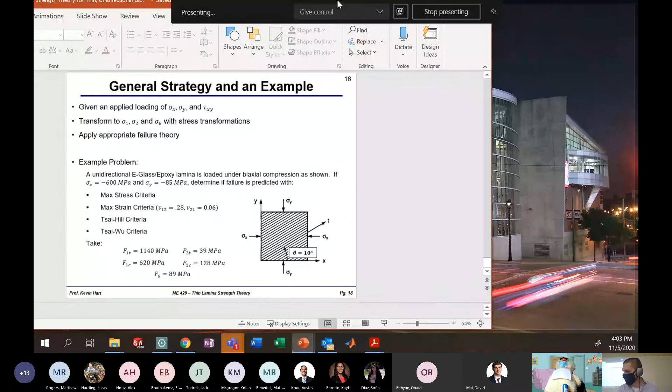This is the very last slide on unidirectional lamina failure theories. Here's a general strategy for attacking the failure theories, and there's an example problem here. I'm going to do this example problem on YouTube, make a 10-minute video to go over it, and release that to you guys, probably tomorrow. You can take a look at that.

I want to get on to laminate theory because we need a solid week to do it. So let's get on with laminate theory, which is the next set of notes, which I did post on Blackboard. That's what we're going to start on today.

All right, so away we go, new set of notes, laminate theory. Why is my pen not working? What is happening, my pen is out of ink. The old turn it off, turn it back on trick, I bet that's going to work. Yep, that worked, always works. Turn it off, turn it back on. Okay, so away we go, new notes, this is laminate theory.

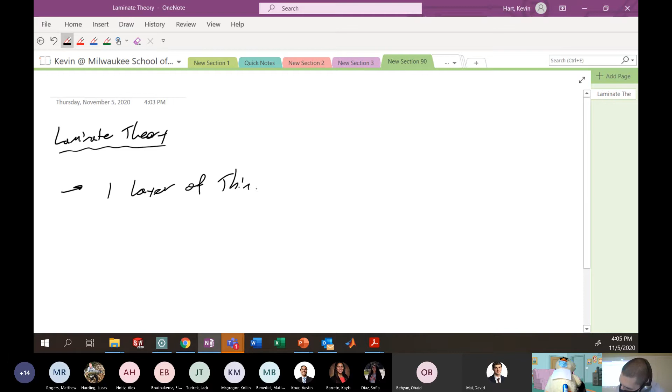The first thing we should do is define a laminate, what it is, and some of the basic theory behind it. Up to now, we've talked about thin unidirectional composites. When we talk about a single thin unidirectional layer, that is one layer inside of what could be a multi-layer laminate. Typically, one layer of thin unidirectional material we call a lamina. I've thrown that word around a bit without fully defining it, but now it's on the books.

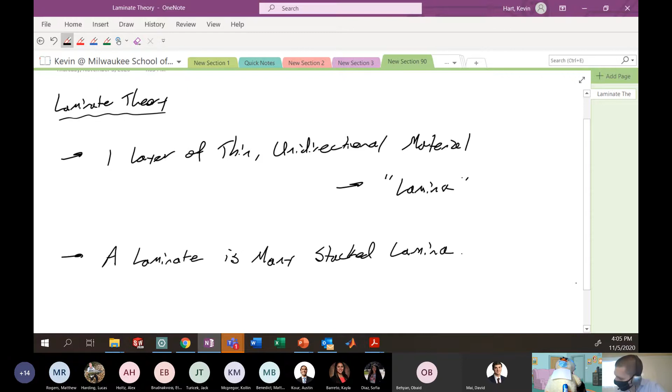Many lamina stacked on top of each other consist of a laminate. So a laminate is many stacked lamina. I'm trying to show this with a picture in the notes, this is introduction slide number 2 in the notes.

Is this idea here, and so sort of a picture of this. I bring in the picture from the notes because, again, my artistic skill is very suspicious. But here is something like this.

So basically everything we've done to this point is on this sort of lamina structure. We talked about how to get properties of that lamina, like in the direction of the fibers, across the fibers, and in some general arbitrary direction. We talked about what the failure strength of this lamina is, in the direction of the fibers, across the fibers, in some arbitrary direction.

The next step in our analysis of composites is what happens when we stack many of these lamina on top of each other to create a laminate.

Your laminate can consist of many layers that are not necessarily all with the fibers in the same direction. You could have fibers that run in multiple directions, and that's what we're trying to show with this picture. In this picture, this bottom layer, the fibers are running in this direction. The next layer above, the fibers are running in this direction. The layer above that, the fibers are running in this direction. And this layer here, the fibers are running in this direction.

So what we need to do is come up with a method for describing what is the stiffness in some arbitrary direction of that laminate. What is the strength in some arbitrary direction of that laminate. Strength theory is a little complicated, but what we want to do is describe the mechanical engineering properties. So we want some sort of engineering properties of this laminate.

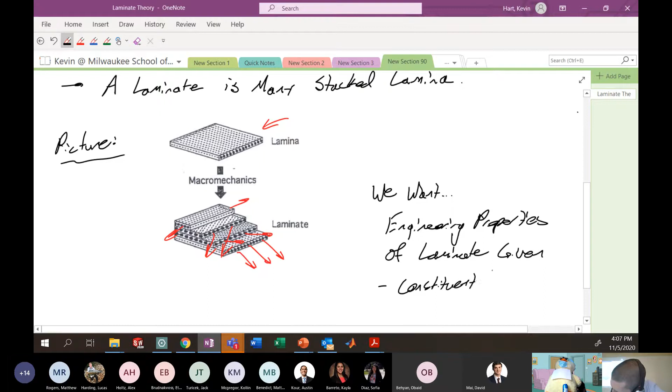Given the constituents inside of the matrix. So that's like, what's the strength of the fiber? What's the strength of the matrix? We're going to want this based on volume fraction, obviously.

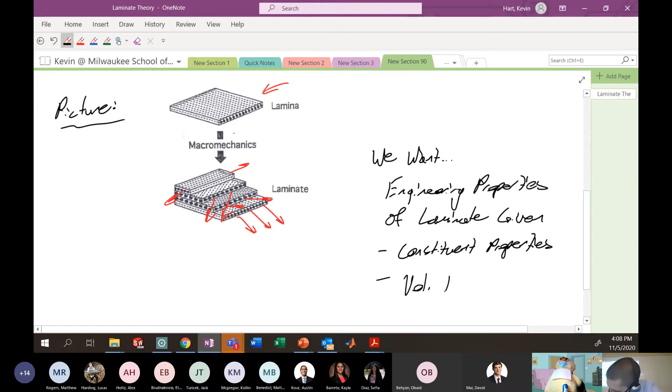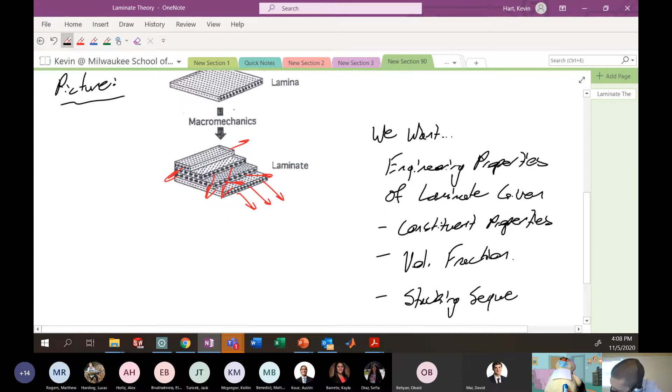The lamina orientation, or what we call the stacking sequence, will become important. And finally, the overall thickness is going to be important.

So that's what we're going to be doing over the next basically 4 lectures, is really trying to derive what is the stiffness of this material. If we apply some force, if we apply some moment, how's it going to bend? How's it going to elongate, deform, etc.? Can we get some stiffness parameters or understand what the stresses are in each one of these layers as we go through?

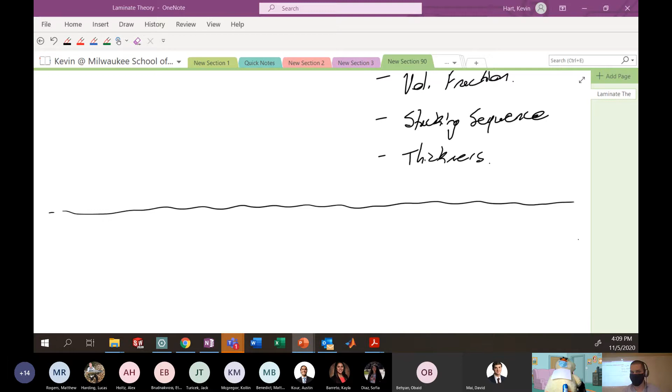So let's get into some basics about laminates, because we need to lay down some very basic ideas of what's happening in the laminate so that we can have some discussion. A laminate is created by stacking multiple lamina.

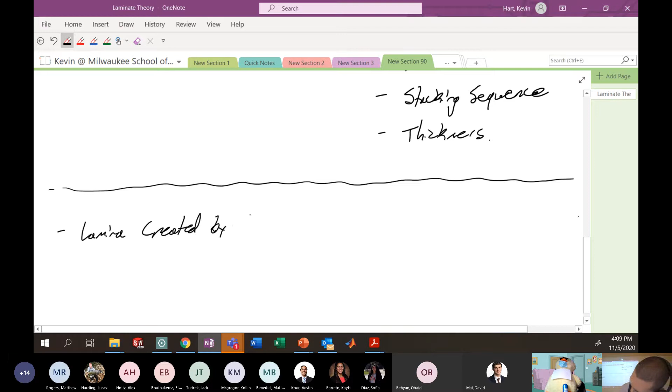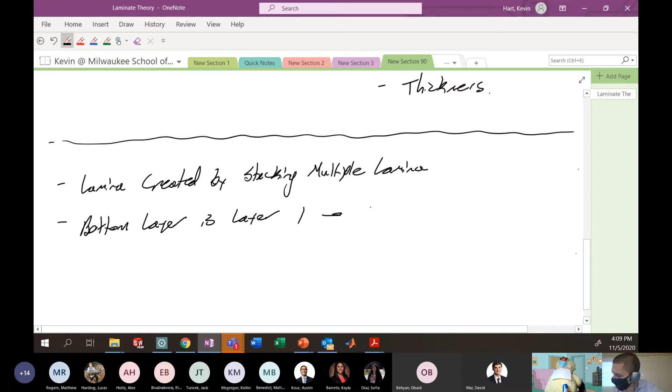By convention, we assign the very bottom layer as layer number 1, and we're going up to layer N. So N is just a number, where N is the number of lamina in your laminate.

When we're talking about a single lamina inside of our laminate, we'll generally use the convention that we're talking about the Kth lamina. So layer of interest is the Kth lamina or layer. So I might say things like, what is the stress in layer K? What is the strain in layer K?

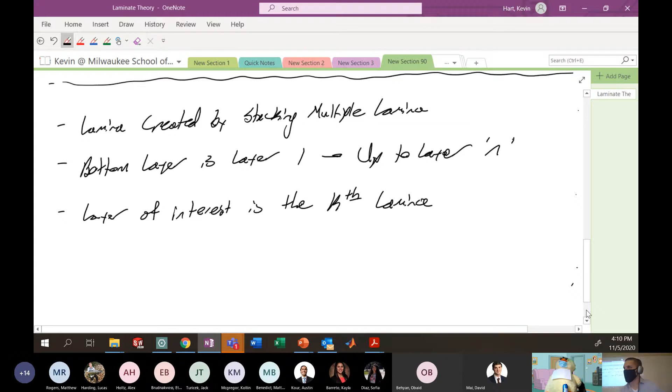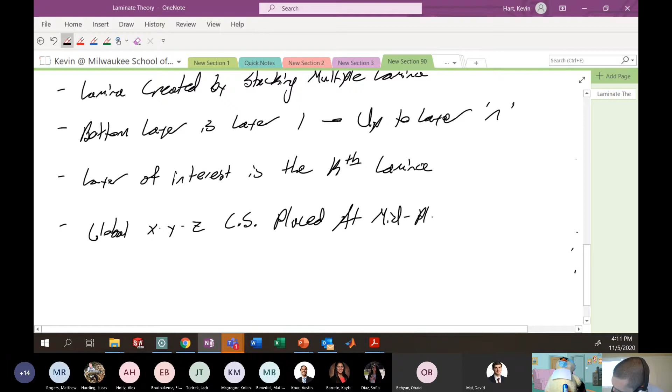When we have a laminate, we place a global XYZ coordinate system at the midplane of the laminate thickness. So the global XYZ coordinate system is placed at the midplane of the laminate stack. And we always say that the Z direction is the out of plane direction.

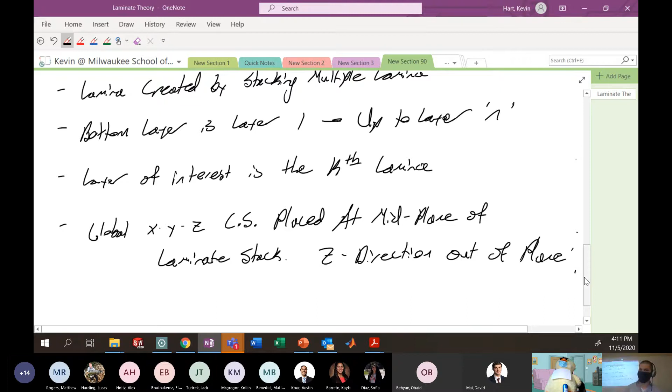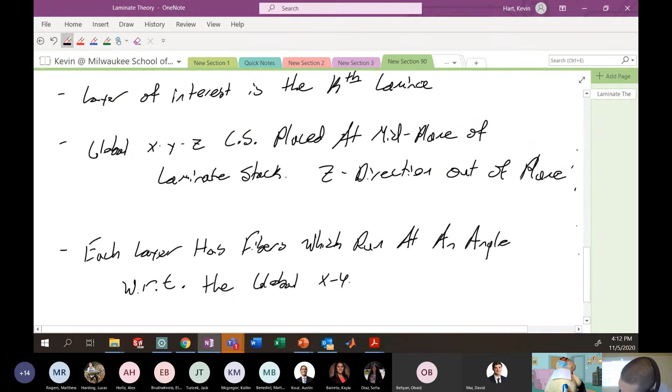Then each layer that exists inside of that laminate has its fibers running in a direction that is oriented in some way with the XYZ coordinate system. So the XYZ coordinate system is global for the laminate, and you define it. Then each individual layer inside of that laminate has an orientation with respect to the global coordinate system. So each layer has fibers which run at an angle with respect to the global X, Y, Z coordinate system given by theta K. It's the angle that your fibers make with the global XYZ coordinate system.

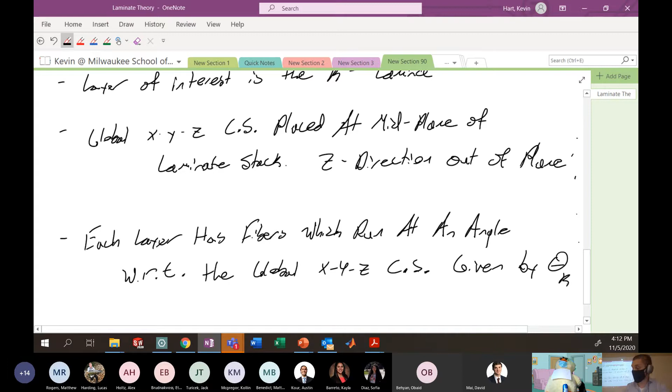Okay, so let's sort of draw a side view of what a laminate might actually look like.

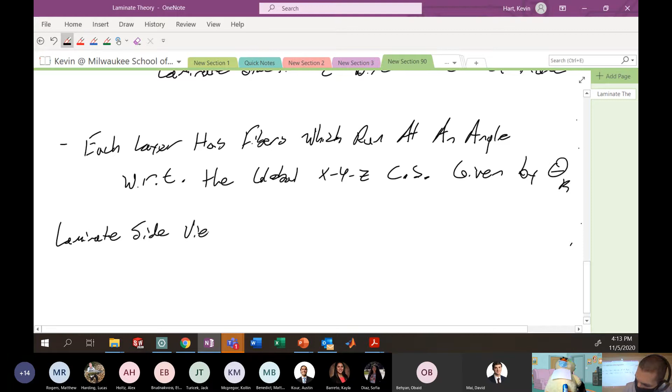Okay, so I'm stacking multiple layers on top of each other. Let's say I'm making an 8-layer laminate. So we segregate this in half, segregate this in half, segregate this in half, and each one of those goes in half. Okay, so this gives me an 8-layer laminate. So here, n equals 8, okay, 8 layers.

I'm going to put my global XYZ coordinate system emanating at the midplane. So my XYZ coordinate system, I'm going to be looking at just one side of this laminate. So here, this is like X, Y would be into the page, and Z is your through-thickness direction. So that's where my XYZ coordinate system sort of emanates.

Each one of these layers has a number. This is layer number 1, it's on the bottom, so here this is layer 1. And we'll say that for this particular layer, K is equal to 1. The kth layer, K is equal to 1, this is the first layer. And obviously this very top layer, K is equal to N, which here is equal to 8.

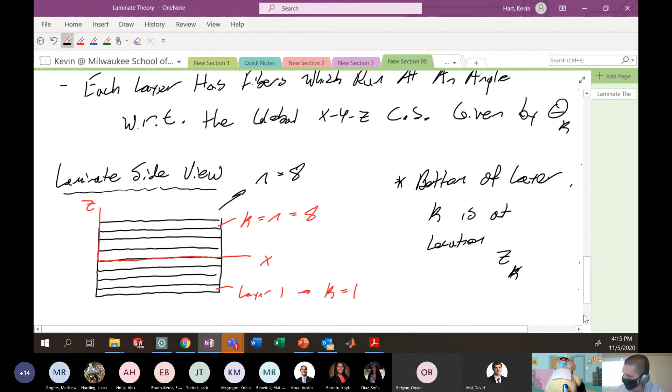So this distance here would be Z sub 3, okay, it's the bottom of the third layer. That location is Z sub 3. This location here would be Z sub 7, just as an example, the bottom of the 7th layer.

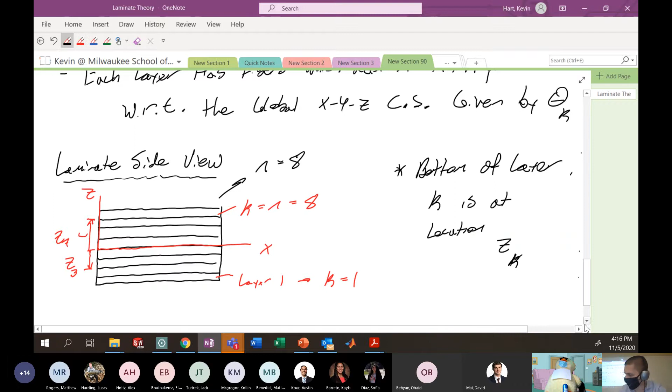That's because we don't want any zero index, right? Z1 is the bottom of layer 1, Z2 is the bottom of layer 2, so on and so forth, all the way up to Z8 up to Z9 for the top of my 8th layer.

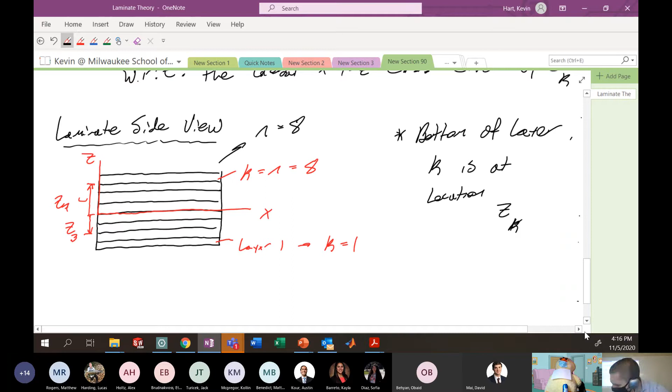Yep, that's right. All right, so there we go. We got some basic semantics down for how we're organizing the coordinate system and talking about our individual layers. Now what we want to do is talk about the laminate stacking sequence and really hammer that idea home, because that'll be important as we move forward.

Next. Laminate stacking sequence. Oh, handwriting today, just too much coffee. I was trying to stay awake grading your papers.

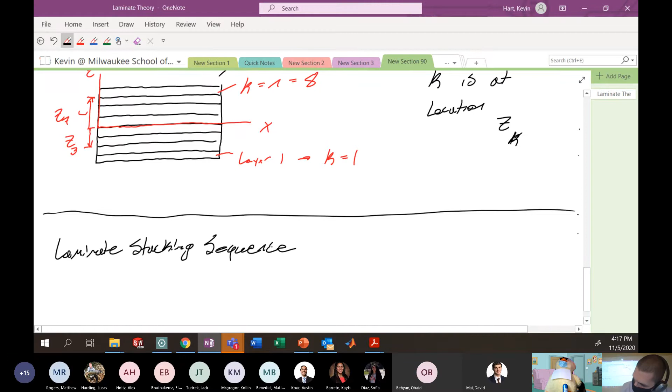All right, your laminate stacking sequence. So when you go to create a composite laminate, you want some sort of method to describe how you're doing the layup in a shorthand way. If I'm going to make a laminate and stack 16 layers on top of each other, I need some fast way to tell you, if you're going to be manufacturing it for me, how I want you to stack those layers on top of each other. So I need an easy way to describe that, and the stacking sequence is what is trying to achieve that.

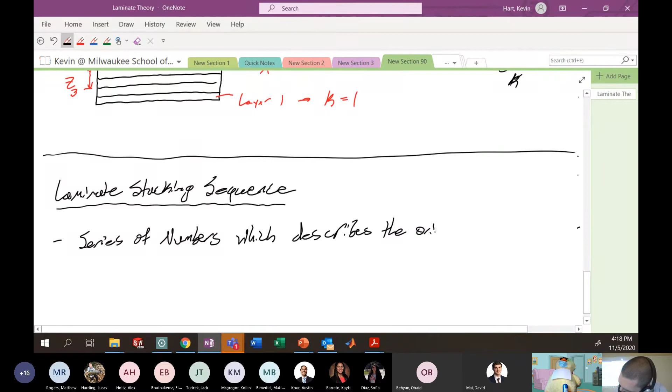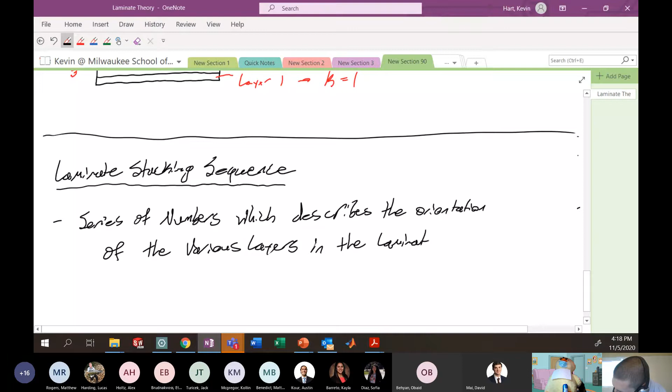The stacking sequence is like a series of numbers that describes how the various layers are stacked on top of each other to make your composite. This is a series of numbers which describes the orientation of the various layers in the laminate with respect to the global XYZ coordinate system. And when we do this, the first value in the stacking sequence is the bottom layer.

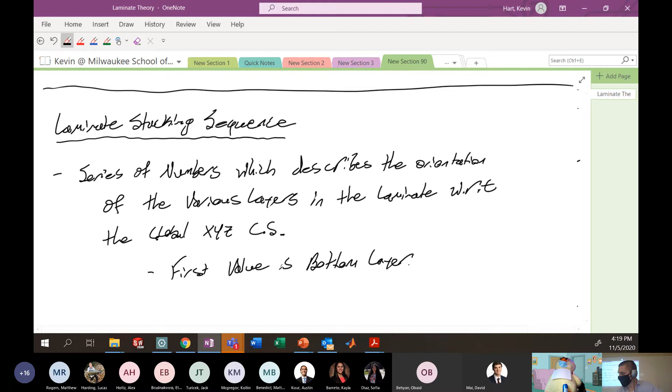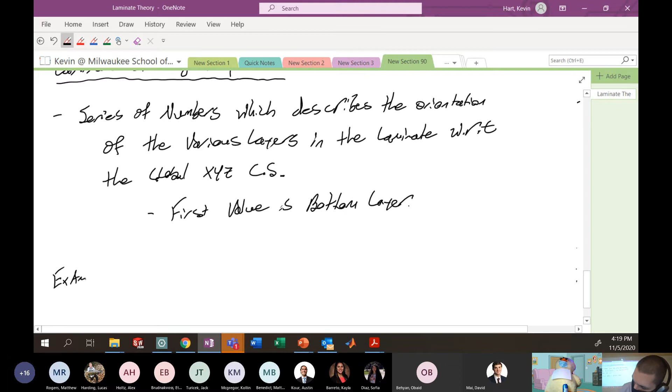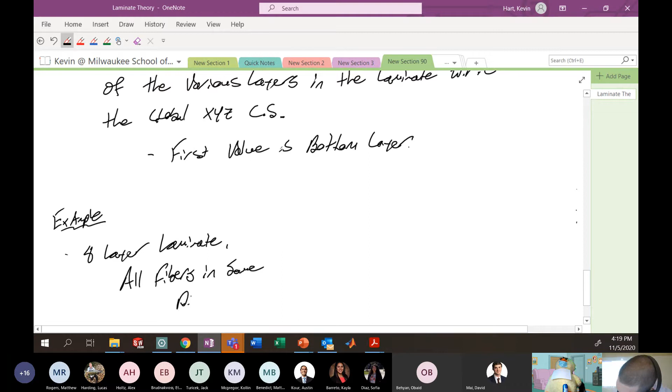Okay, so best illustrated with an example. So one example might be if I want an 8-layer laminate where every single layer has the fibers running in the same direction. What would that look like? Well, that would be like if I did this following situation.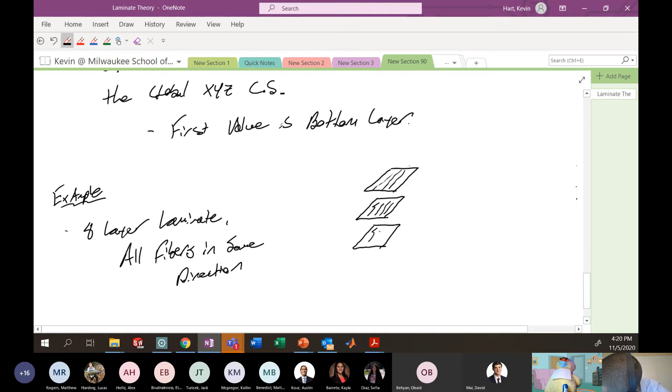So here, this is what's going to be the top layer. Then the next with the fibers running this way, then the next with the fibers running this way, 8 total. These are all going to be stacked on top of each other to make my composite.

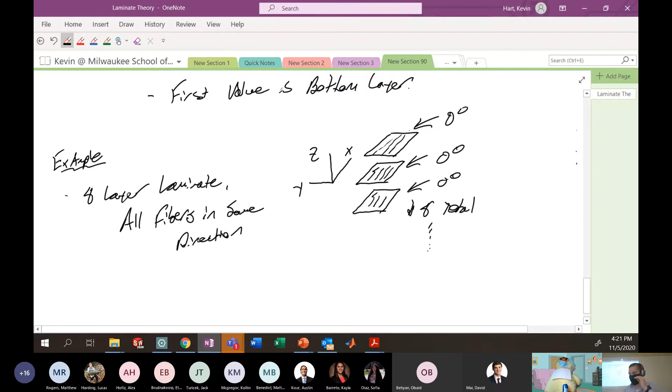So if my global XYZ coordinate system was something like what I would expect, then this particular layer has its fibers running in a 0-degree orientation. These fibers run in the same direction as this x-axis, right? Same thing with the layer below it, those fibers run in that x-axis, okay? So this would be a 0-degree layer, this would be a 0-degree layer, this would be a 0-degree layer, and all of the ones that would create for me an 8-layer composite would all have this orientation of 0 degrees.

So the stacking sequence is the following: 0, 0, 0, 0, 0, 0, 0, 0. That's your stacking sequence. Pretty straightforward, okay, a lot of zeros. You guys are used to that, right? No, just kidding, you guys do all your homeworks. Some of you, I don't know, a little suspicious. I don't want to write all those zeros.

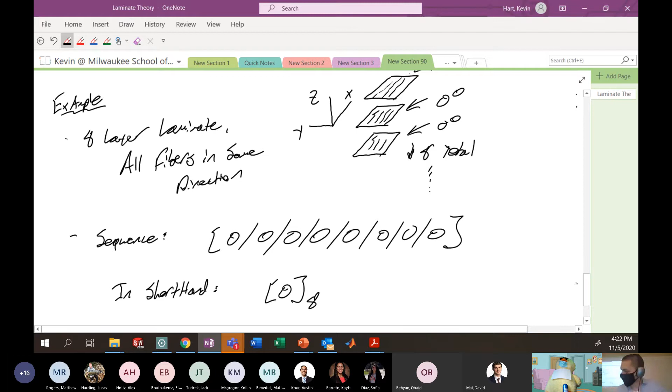That's kind of annoying, so in shorthand this is typically seen as the following: 0 subscript 8. Okay, that's 8 layers of 0-degree orientation lamina laid on top of each other. All right, let's do one more example.

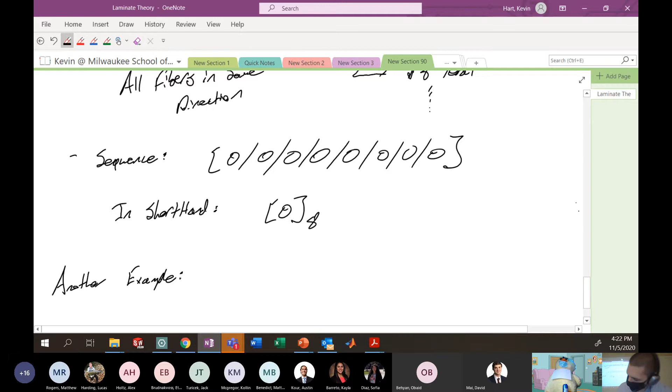We may wish to create a laminate that has an equal distribution of layers pointed in various ways. This would create for us what we call a quasi-isotropic structure.

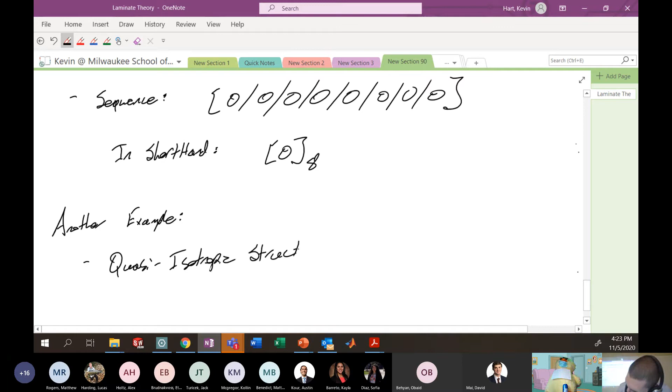Let's say that stacking sequence was 0, 90, 45, minus 45, minus 45, 45, 90, 0. The idea here is that I lay one down at 0 degrees, then another at 90 degrees to that, then another at 45 degrees, another at minus 45 degrees, minus 45, 45, 90, 0. That's the general idea. This would be another 8-layer structure, but it has a different stacking sequence, so you get 2 different kinds of ideas.

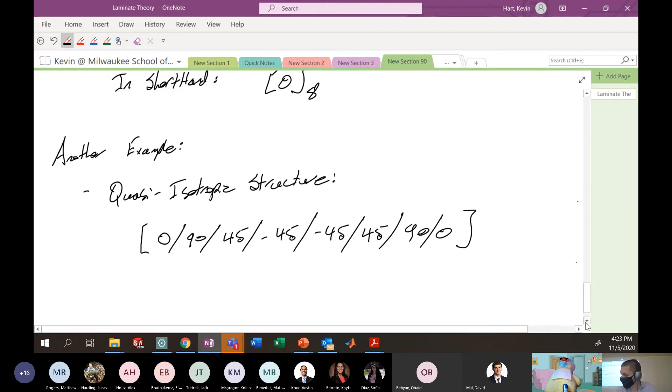I'm not going to try to draw that one. There's actually a picture of this in the notes, and I'm just going to bring in both pictures here so you can see this. It's a little bit better from the notes.

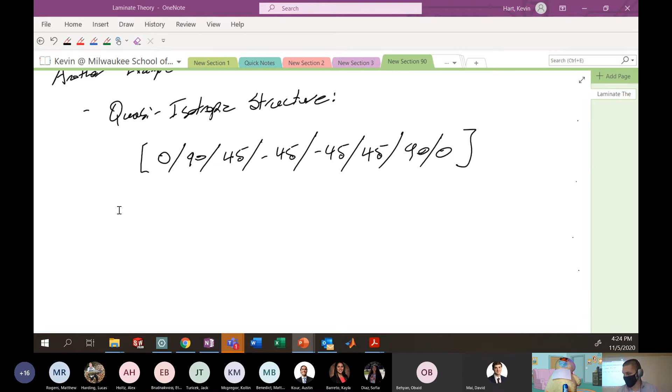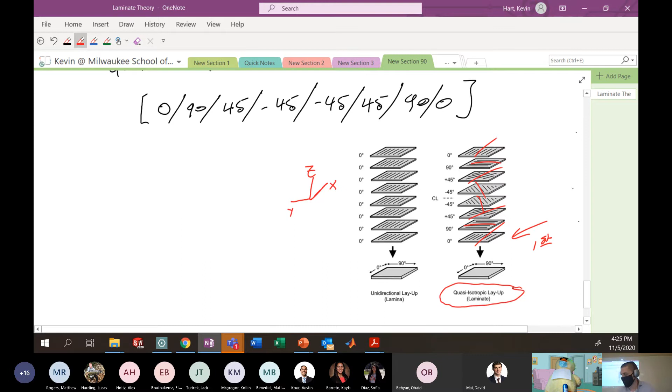Again, this is an 8-layer laminate, and I might want to write this in shorthand. We have a method for that: 0, 90, 45, minus 45, closed off with a little s on the bottom for symmetric. So basically, when you have a symmetric laminate, you do those 4 layers, and then you mirror that about the last layer.

So remember, this is like layer 1, 2, 3, 4, then 5, 6, 7, 8, if it were symmetric.

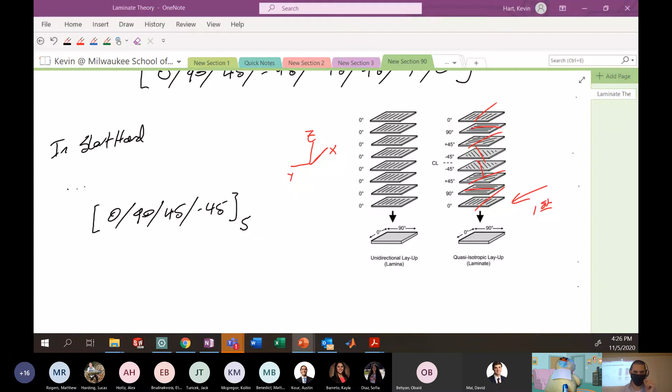Okay, now that we got some nomenclature out of the way, let's do some math. I'm going to bring in a figure here that will become the Bible of our derivation over the next probably 3 lectures. I'm going to give you some time to copy this figure because it will be somewhat important for what we're going to do. So here you go.

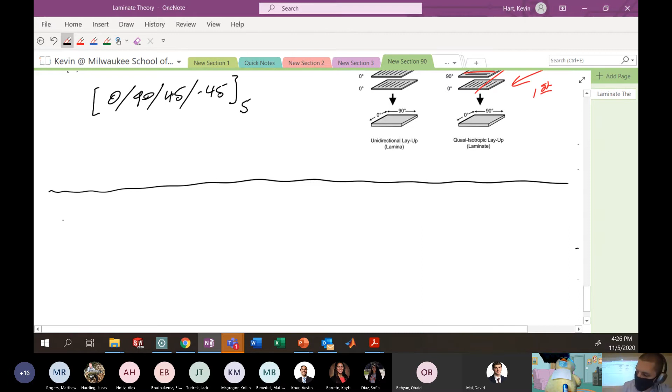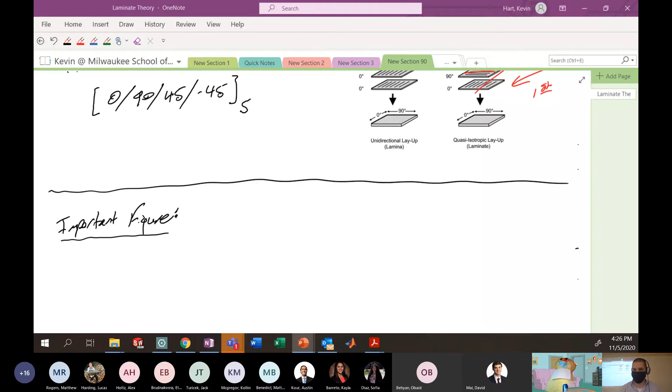Important figure. Instead of trying to draw this myself, which we all know is a bit suspicious, I'm just going to bring in the figure here and hope that you can do your best to copy this down.

I'm going to talk about this figure and how we're going to use it in our derivation. Here's this figure. I'll give you a couple minutes here, but I'll talk about this as you're copying it down. Again, we see our global coordinate system, this X, Y, Z, and we notice the XY plane is in the center of the laminate stack. The XY plane is in the middle of that stack.

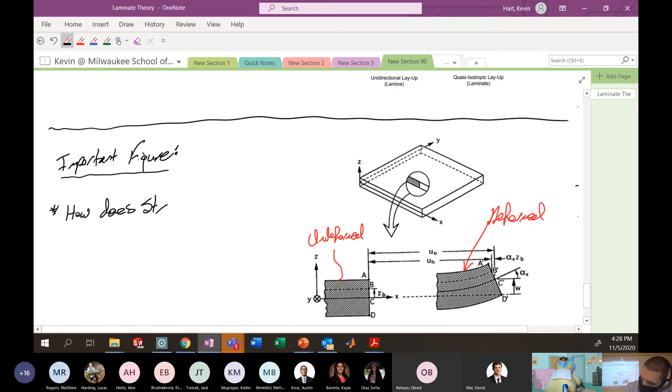What we want to do with the upcoming derivation is assume that this here is like an undeformed condition, and we're moving to a deformed condition. I want to investigate how an arbitrary point in the center of that laminate, this point B, how does the strain develop as we move from the undeformed condition, point B, to the deformed condition, B prime?

I'll give you a couple minutes to do your best with that figure. I really encourage you to copy that down right now.

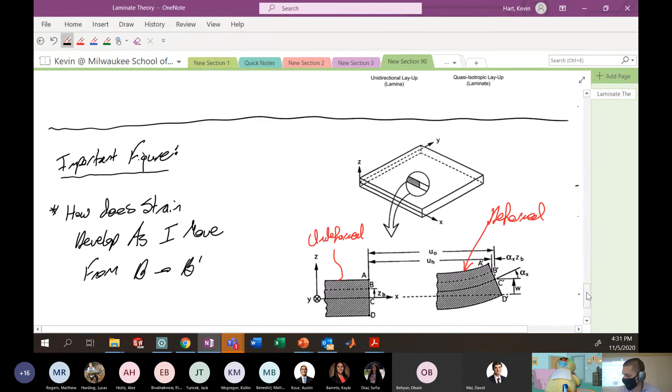Well, yeah, it evolved from bats, I guess, but crazy. Guess my dog better not cough on me. Gotta start putting a mask on Rocky.

Okay, so here's the general strategy. We're going to start with this general laminate, and notice that we haven't drawn any layers in there. We're just talking about a generic plate.

The first thing I want to do is, since I know this plate is deforming the same way regardless of how many layers I have, we're going to assume all those layers are moving and straining together. So all the layers will have the same strain. That's the strategy.

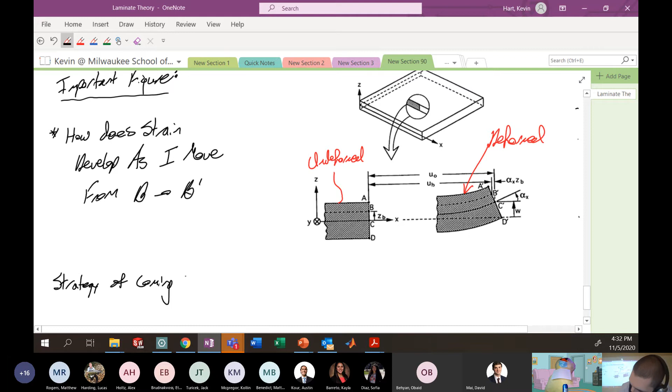Of the upcoming derivation: one, we're going to start with this general plate and define the strain at this arbitrary point, which I mentioned is point B. As we go from B to B prime, what is the strain that develops?

Remember, strain is like the deformed length divided by the original length, right? Once we have that strain, we can say that it develops in some sort of variation through the thickness of the laminate.

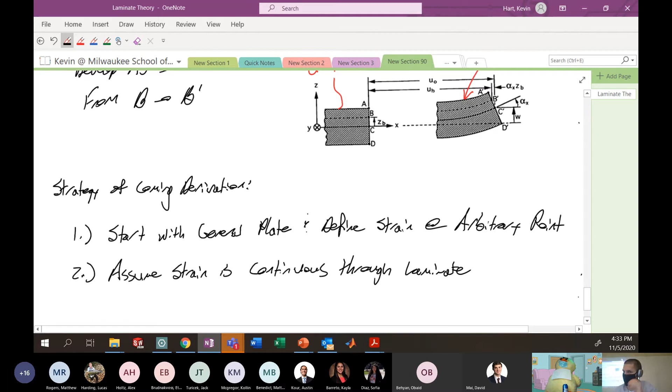So we assume the strain is continuous through the laminate. Okay, and that will allow us to determine the stress in layer K.

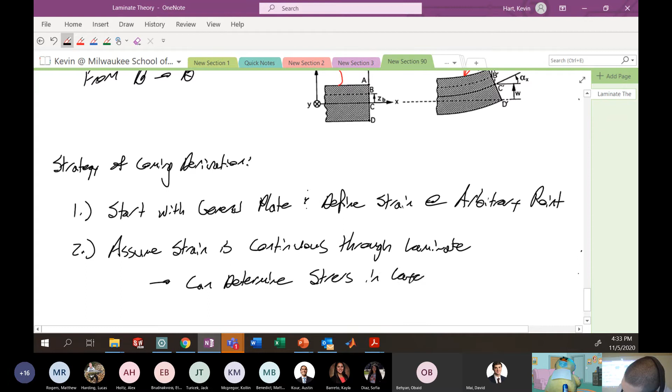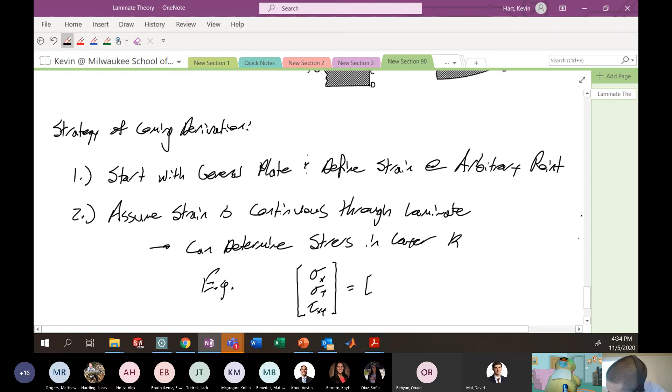For example, if we have epsilon x, epsilon y, gamma xy, which we're going to derive, giving our little plate theory - sorry, we want the stresses. So we can calculate the stresses, assuming we have some sort of stiffness Q of layer K, multiplied by the strains that we develop in layer K. That's the general concept.

So the stresses that develop in layer K is just the stiffness of layer K, which we know, multiplied by the strains that are in layer K. Okay? K.

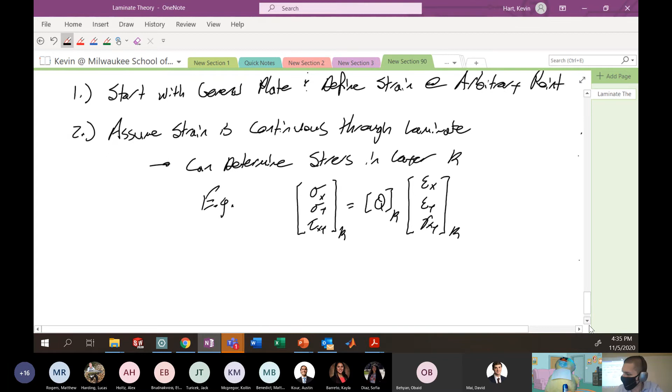Then we're going to add up all of the stresses inside all of the layers in one particular edge of the laminate and say that the total area of that edge multiplied by the stresses in each one of those layers has to equal the original force we put on the laminate in that direction. That's the general idea of the next piece.

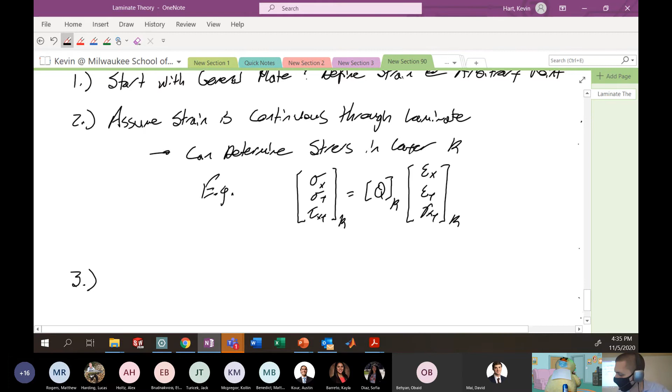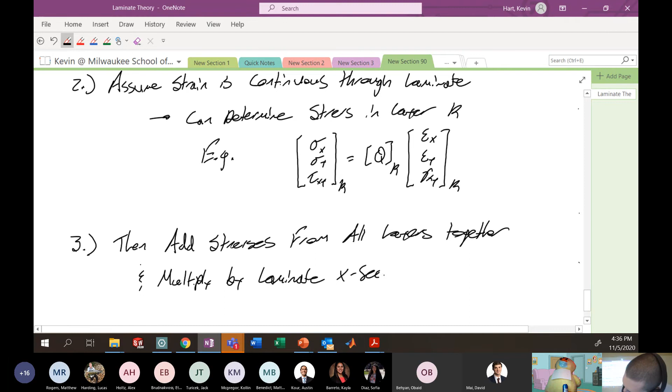Then, add stresses from all layers together, and multiply by laminate cross-sectional area, and enforce equilibrium.

Such that, in shorthand, the stresses that are developed multiplied by the area of that cross-section equals whatever force is on that particular side of the laminate. We're trying to balance the stresses inside the laminate with whatever forces we applied to the laminate. Sort of makes sense - it's equilibrium, right?

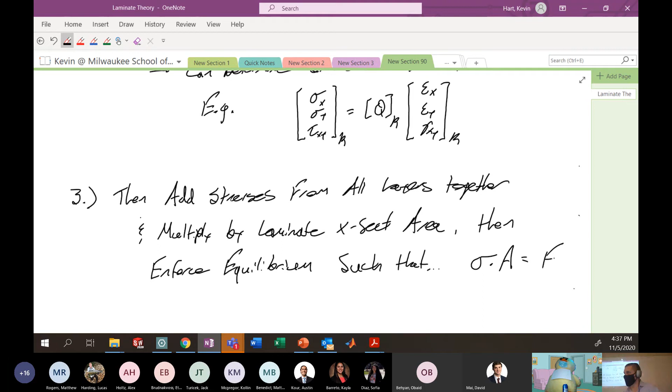But because we have different orientations of the fibers in different directions, the stresses inside each of those individual layers will not be equal. So we need to calculate the stress in this layer, the stress in this layer, the stress in this layer, multiplied by the area of that cross section. That has to be balanced with the force we apply. This is just a very basic shorthand idea.

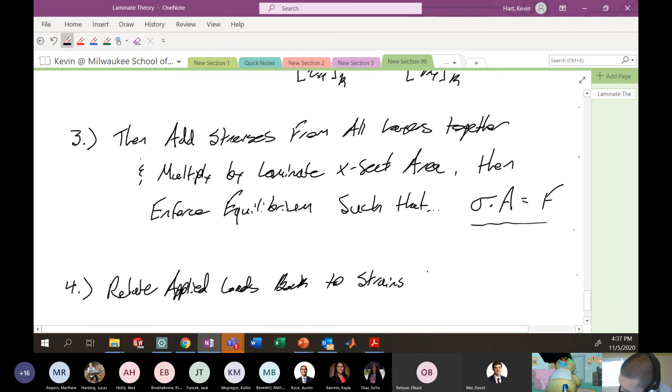And finally, relate those applied loads - so here's your applied load - back to strains, to develop a laminate stiffness.

Okay, so generally, I want to know if I apply forces to my laminate and moments to my laminate, what strains are going to result in my laminate. That requires a stiffness matrix that tells me if I have this sort of load, how much does it elongate? If I have a bending moment, how much does it curve? Those sorts of things, okay?

And we know for composites that we can load in this direction and get curvature because of some weird stuff that happens with composites, because they're anisotropic in nature. So we have a lot of coupling here that we need to talk about - a lot of weird loading situations that lead to weird strains, and we just have to walk through all that stuff.

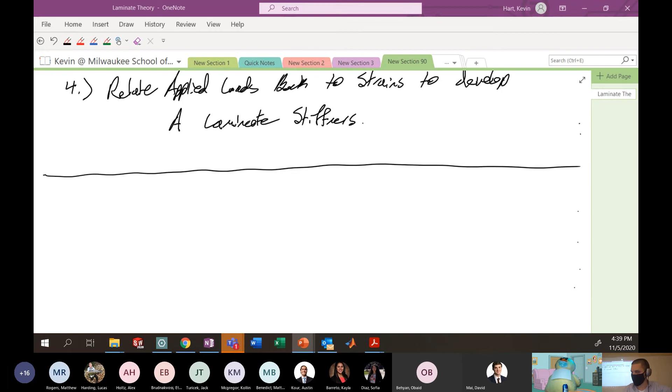Okay, so let's talk about what assumptions we're going to make in the derivation, and then probably starting on Monday we'll go through the derivation. Maybe Monday's the day you need to wear your math pants. I thought we were going to get to this math today, but no, wear your math pants on Monday because we got some complicated Calc 4 level derivations coming. Very exciting stuff. All right, let's talk about some assumptions we're going to have to make.

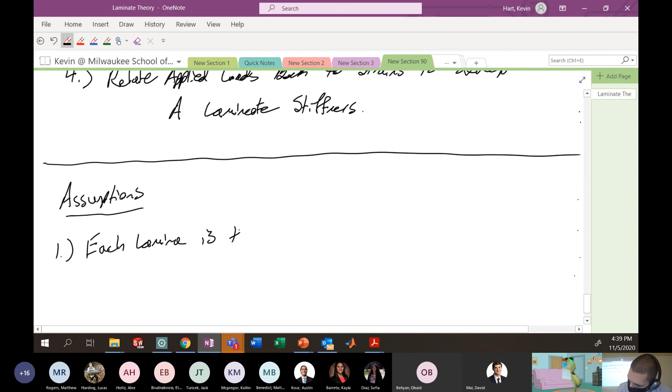One, each lamina is thin. We've kind of made this assumption from the very beginning of this lamina theory, talking about plane stress in each one of these situations. Each lamina is thin - this is going to be important in our derivation. So it's in plane stress and doesn't carry any shear, more or less, outside that particular plane.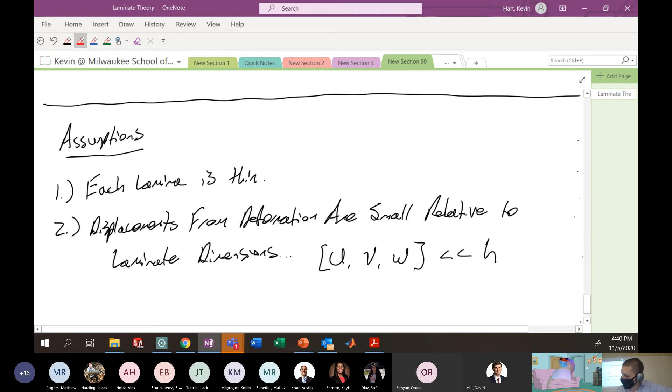We'll say displacements from deformation are small relative to laminate dimensions. We're going to talk about displacements as u, v, and w - this displacement vector. All of these values are much, much less than the thickness of the laminate, which we're going to call h. This is total laminate thickness.

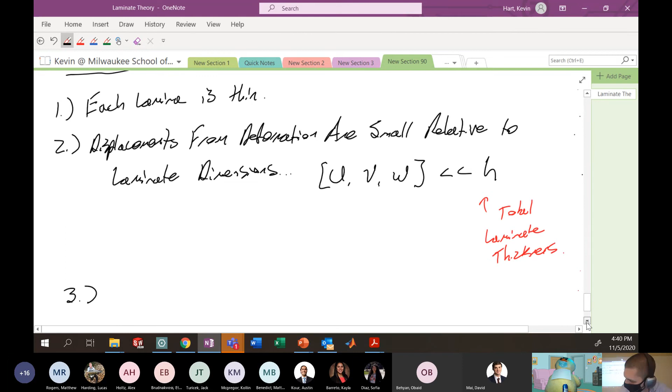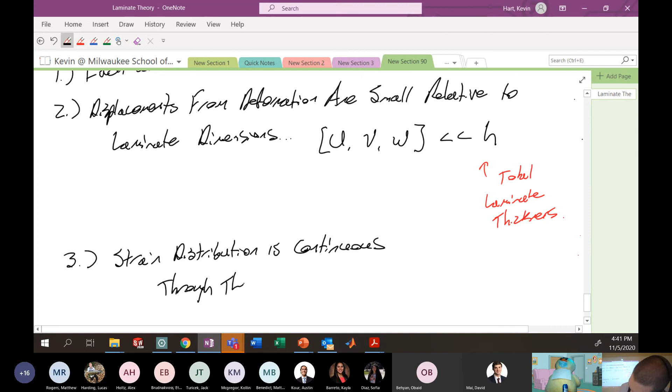Third, strains are continuous through the laminate - already mentioned this. It's not constant, it's continuous. So if I'm looking at a strain distribution, if you thought about loading this with a typical bending moment M, something like that from your 3005 class, what we're going to assume here is that the strain distribution through this is going to be continuous. Hopefully this looks familiar - this would be your strain distribution through the thickness.

We are not assuming a continuous stress distribution through the thickness. It's because the different layers are going to be oriented differently. Maybe this layer has fibers running in this direction, and this layer has fibers running into and out of the plane. In that situation, this layer would be much less stiff than this layer. So you would not have a continuous stress distribution. Just keep that in mind.

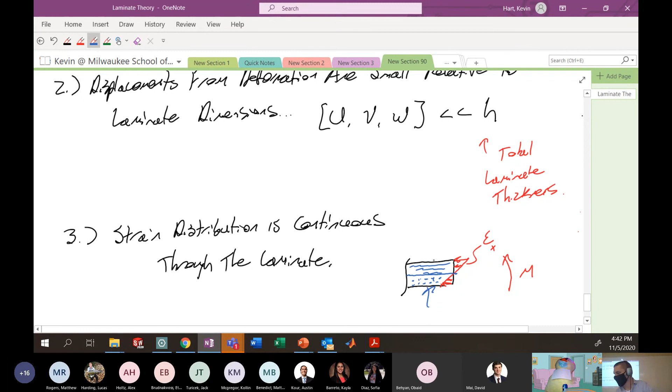Next, this one's a little bit difficult to explain, but the displacements vary linearly through the thickness of the laminate. What do I mean by that? Well, if I have a bending moment applied, I'm going to see some deformation that might look like this. What I'm saying here is that this line here is linear. In reality, this does not actually happen - this is probably like an assumption. In reality, what actually happens is something that looks a little bit more like that. That's what happens in reality.

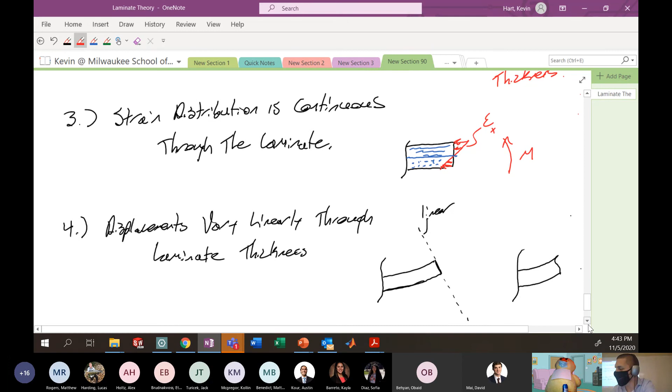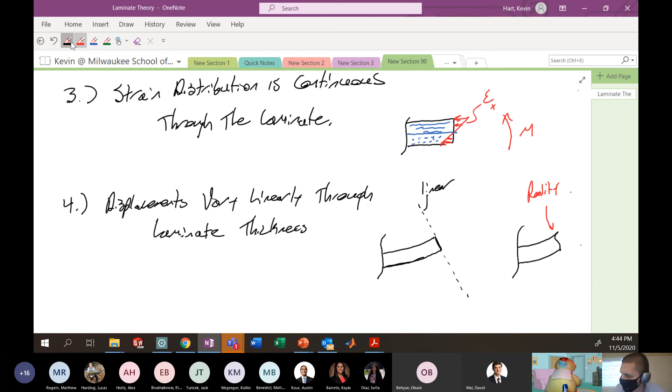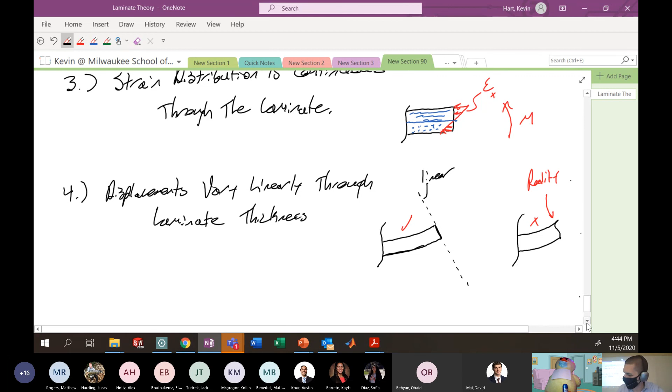Ever done this with a deck of cards? You would see something that looks like this. So we are assuming this; we are not assuming this. We're doing Eulerian plate theory - this is Timoshenko-esque plate theory, for those of you who have really gotten a handle on mechanics.

All right, next: transverse shear is zero. This kind of goes hand in hand with assumption number 1. What I mean here is that gamma xz and gamma yz are 0. This kind of comes with your plane stress assumption, but I'm just throwing this out there in math speak.

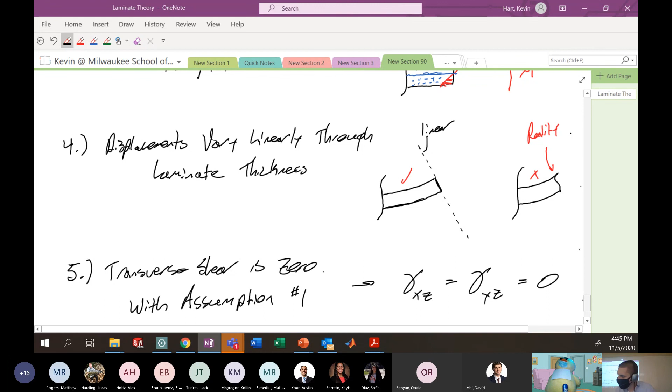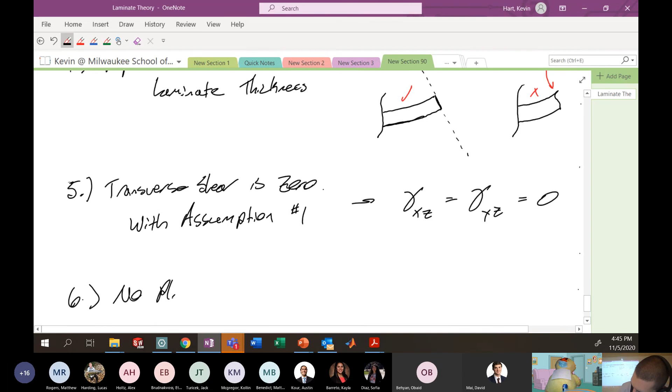Six, no plasticity. That one's pretty self-explanatory.

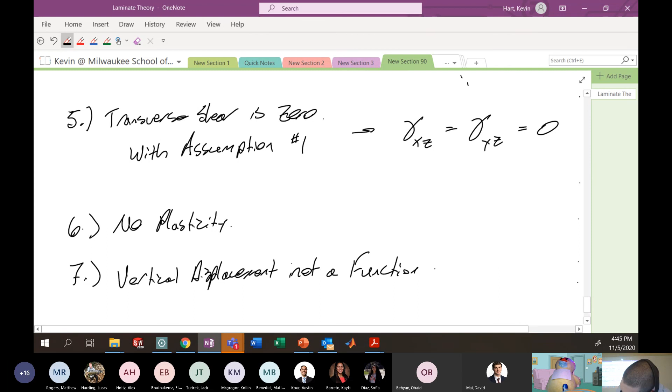Lastly, this one's a little bit tricky to explain, but the vertical displacement is not a function of z. What I mean is that this variable w, which is this vertical displacement that we're going to use, is not a function of z - it doesn't vary through the thickness. If you move up, each point is moving up the same amount; if you move down, each point is moving down the same amount. It's kind of an assumption that we're making - again, not realistic, but it's what we're assuming.

The last one, it's not listed in your notes, but it is an assumption we're making, is that all the layers are perfectly bonded to each other. That just means your layers are not sliding across each other like a deck of cards.